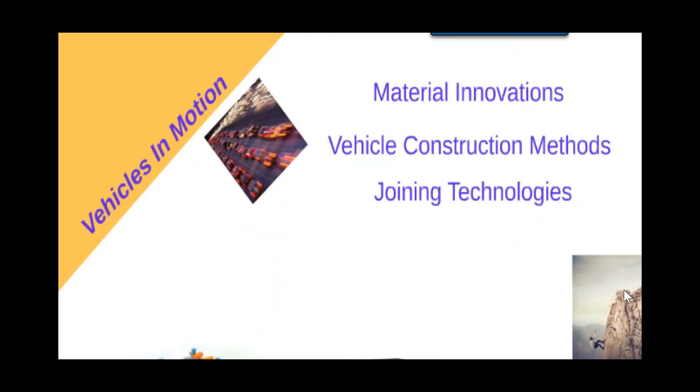We're going to be talking today about a lot of different topics, and I know the main topic was going to be steel and aluminum, and surely we'll talk about that in detail, along with some of the other challenges that we're facing in the industry today. So we're going to talk about material innovations, vehicle construction methods, whether it's steel, aluminum, maybe a little carbon fiber. But the other thing that's changed with that are the joining technologies that have evolved due to the advanced high-strength steels and so forth.

So this really is about technology, about quality, about precision. We'll talk about a little bit of welding and how all of those things affect the vehicle. We're certainly not dealing with the same vehicle that we were 10, 15 years ago, or in many cases even 2 or 3 years ago. And that's just how fast technology is changing.

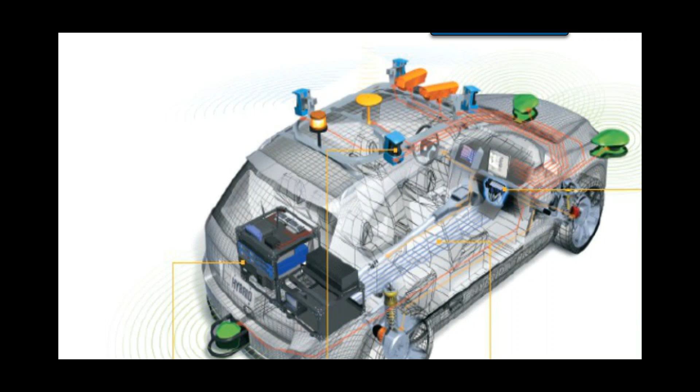Now, we don't see stuff sticking out of the car like that on modern vehicles, but that's installed somewhere on the vehicle so they can perform all the functions that are needed for safe driving and some of the things that go along with that.

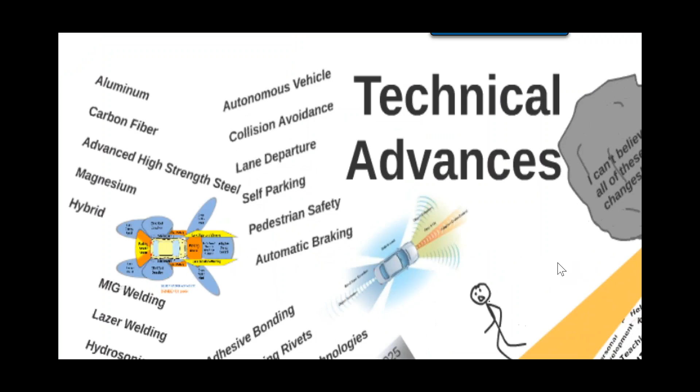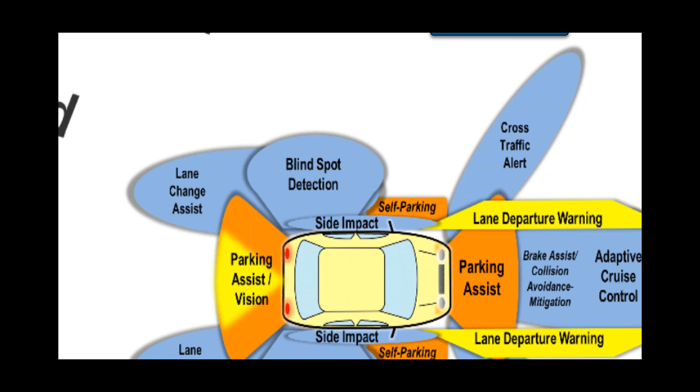You know, when we talk about vehicle construction, there are so many technical advances coming our way. It's actually just too fast for the technician, who can hardly hold on to some of these changes in our industry. We're dealing with different materials all the time: aluminum, carbon fiber, advanced high-strength steel, magnesium, composites, all kinds of different things. And all of that goes into not only the vehicle structure and strength, but add all of the things that we just looked at about blind spot detection, parking assist, brake assist, all the other things that go along with the vehicle. And as you know, it becomes a complicated thing.

Well, why do we have these changes? Because of the corporate average fuel economy, the federal government mandates that vehicle manufacturers get 54.5 miles per gallon by 2025. We're not quite there yet, folks. But that's why we're seeing all these changes. Vehicle manufacturers I deal with frequently say a gram a day. What that means to them is if they can reduce a gram of weight from the vehicle every day, they are succeeding in getting better fuel economy. The lighter the vehicle, the better the fuel economy.

So we see a combination of a lot of materials, and the question always comes up, well, which one's going to win out? Aluminum, steel, carbon fiber, magnesium? I really can't tell you, but I do know this. You're seeing all of those in all kinds of vehicles.

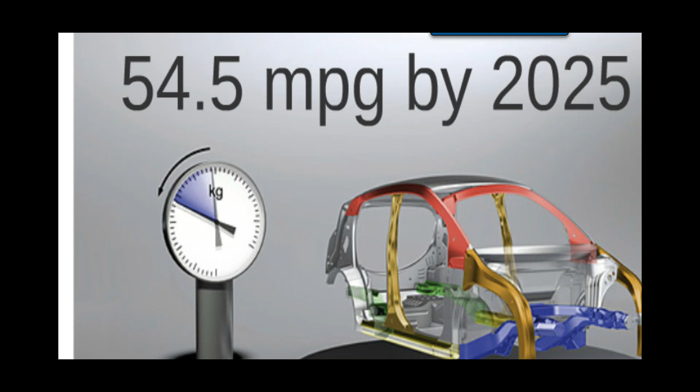So I don't know that we're going to see one predominant material. I'm going to assume that with technology and as it changes, the normal vehicle will have 3, 4, 5, 6, 7 types of materials. Well, every time a vehicle construction changes, it changes how we repair the vehicle. And what we have to do is stay up with the industry. That is a tall task for everyone.

I recall working in the body shop in the back of the dealership, probably the last person to ever know of any of the changes that happened on the vehicle. Didn't have access to OEM information, didn't get formal training. So we just fixed the car the way the guy in the stall next to us did, not knowing if that was the right way or not.

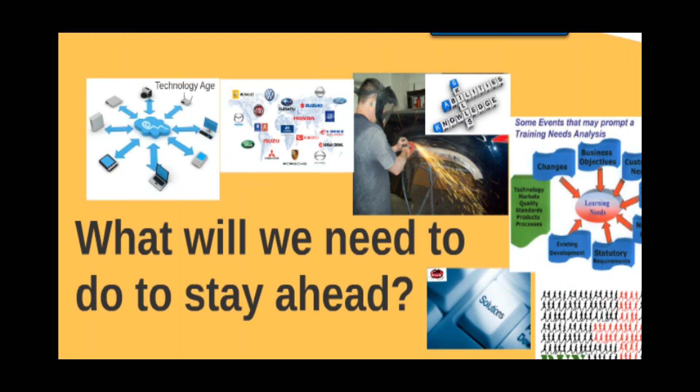So what do we need? We need solutions. We need to know that what we're doing to repair the vehicle is correct. And OEM repair information supersedes anybody. I work for Chief and have since 1986. I've also taught I-CAR classes for 25 plus years, and it really doesn't matter what Chief or I-CAR says. It's what the OEM says. They're the ones that call how they want their vehicle repaired.

So looking at education, how do you get there? I don't know. You just have to keep going, have to keep trying to be educated. And it takes an effort. I'm sure that people today realize that if you want to be doing this kind of work the next 3 to 5, 10 years, training is going to be required. And it's not just training. You know, we think about training. We don't act on it all the time because we don't have a formal plan of how we go about understanding what our training needs are.

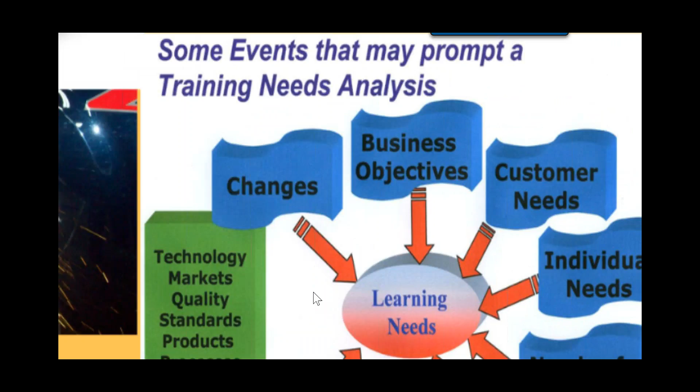So you can kind of look at this little chart, and you see some of the business objectives, the customer's needs, that person's needs, the needs of the shop, the technology and the changes. All of that becomes part of a learning needs assessment. And I guess as an industry, we're not real used to doing something like that. But the better trained your people are, the better they will perform, and the better chance you'll have a good, safe repair when you deliver the vehicle. Nothing's worse than hanging your head when you deliver the vehicle knowing that something isn't what it should be.

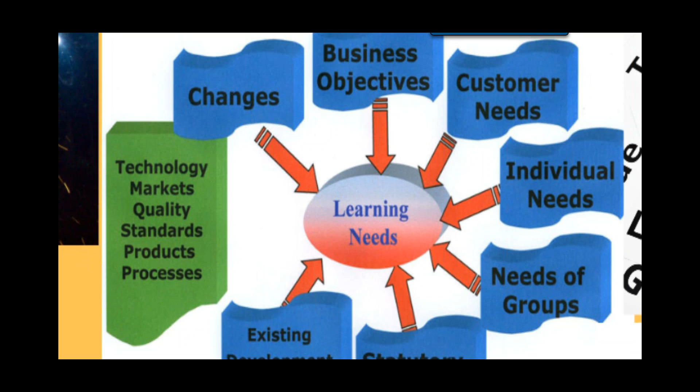For those of us that have been in this business for a long time, we have to take ownership of being a lead technician, being a trainer, being a coach, helping those that are on their way into the industry with personal development. I happen to be working at a shop where we're doing some training. They have 3 apprentices. Each technician has his own apprentice that he teaches, he coaches. He's ensuring their personal development, they get the right tools, they're going to the right classes. Folks, that's what it's going to take for our industry, the right people to fix these cars correctly.

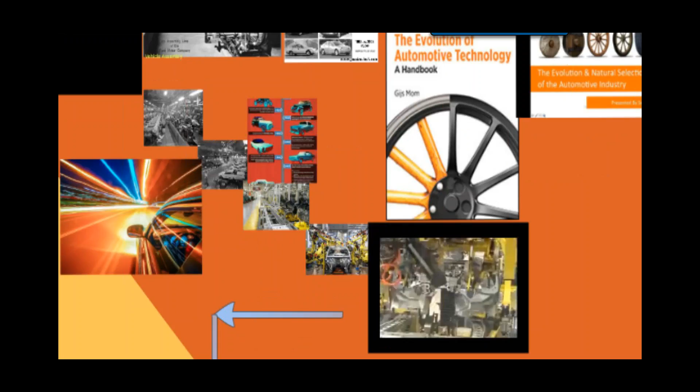Work safety, obviously we're dealing with a lot more technology than we have in the past. We'll kind of skip that for today, but a good topic. You know, they just don't make cars like they used to.

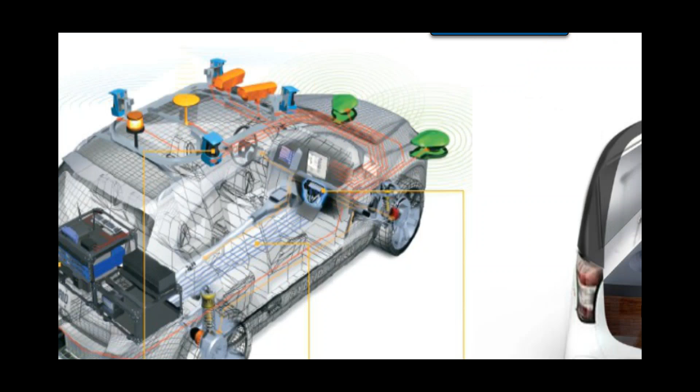I like to play this little video because it's kind of fun, if it'll play for me. Let's see. Whoops. Sorry, folks. This is more embarrassing for me than you know. We'll get back up there in a second. I'm sorry. Hope I didn't make you too dizzy. Well, certainly my little video is not going to work, so that tells me that the one at the end is not going to work.

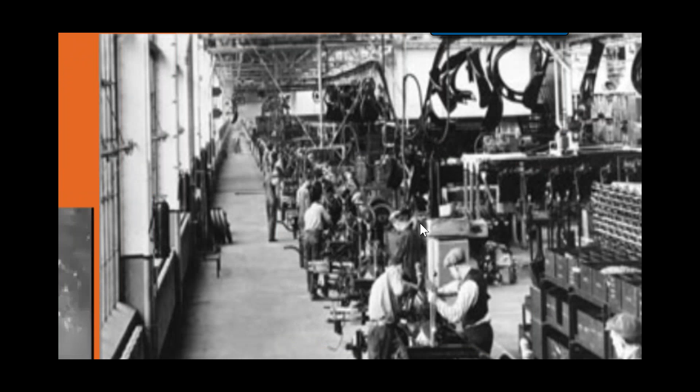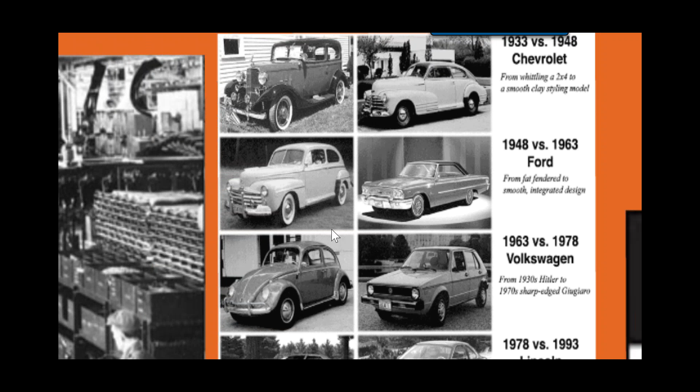But you know, you kind of talk about the evolution of the vehicle. We've come a long way from assembling vehicles like you see here on an assembly line. All the way through the early 30s and the 40s, and then getting into the 50s, we saw the changes in the technology in vehicles. Every time a vehicle construction changes, so does the method of how we repair it. How they build the vehicle has become really high tech, as you see here.

As you notice there, it's pretty high tech, how vehicles are built. So the construction of the vehicle has changed drastically. And I brought this little photo up here just to kind of show you one of the things that's real critical on advanced high-strength steel vehicles, which is where we'll start with this.

You know, all of us have looked under a unitized body vehicle before and seen where the frame rails are like this or like this, and then they just disappear. When you look at a late model vehicle, you see something different than what we had in the past. And it is this right here. It's another subrail. It goes out, and if you look at it, it goes right out into the rocker panel.

So on what we've experienced on a hard front end hit, we see things that we haven't seen before. A vehicle runs into a wall at 35 miles an hour. You can still open and close the door. Not even a buckle in the roof. Where did the damage go? It's a great question. In our classes, we used to call that collision theory. We thought we knew where the damages were going to deflect through the vehicle. We no longer call that a theory because it's actually a dynamic that's built into the vehicle.

The engineers that build vehicles call that load pathing. We don't use that term very much in the industry these days, but it's becoming very, very critical that we understand what load pathing means. It means as the vehicle collapses during a collision, the forces are distributed through spot welds, not pinch welds, through spot welds to a place where there's a reinforcement where the forces may be directed to the side, to the rear, or down. That's why we call it dynamics, because it's built into exactly how the vehicle will react in a collision.

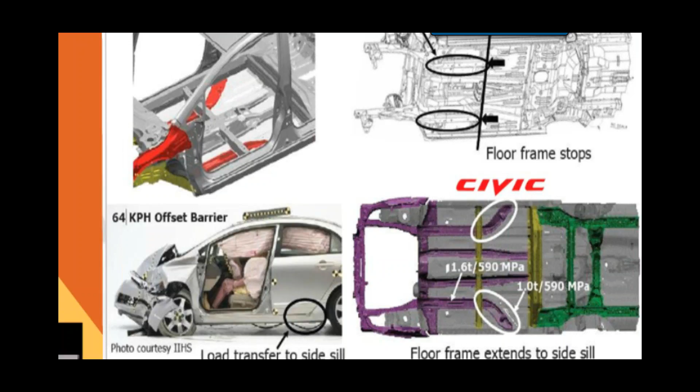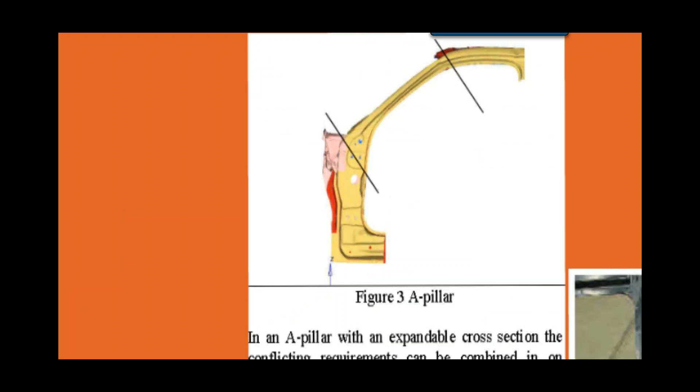So efficiently, things like we saw in the past where we could do an A-pillar, and maybe you could section it in the past. If you look at this yellow piece, it's not repairable, not sectionable, so you can't even section these components. It becomes a real problem. You know, vehicle manufacturers are changing technology so fast, it's almost hard to stay up with.

Now, what I'm showing you on the screen here is a design that BMW played with that is an A-pillar. And on this A-pillar, what you will see is it's very large in the beginning of it here. I'm sorry, it's kind of backwards. It's small at the beginning. And the reason the manufacturer would want to make that smaller is for the blind spot, so you can see around the A-pillar. So if they make that smaller, you have a better line of sight.

This A-pillar that you're looking at here is made of folded metal that upon impact expands to the size of the original type of A-pillar. Folks, that's something we've never seen before. It's not on the market yet. It may be. Lord help us if we try to cut through that A-pillar. Who knows what kind of damage we'd cause with that.

We just need to know how to fix them. I'm convinced that we can fix just about anything. We just need to know how and make sure that it's a recommended procedure by the manufacturers. They certainly don't build vehicles like they used to.

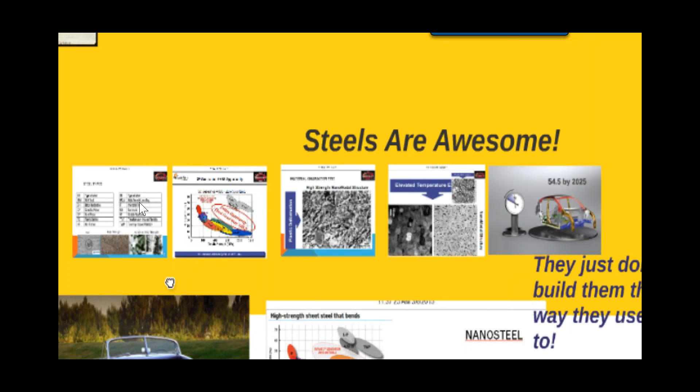Excuse me. I want to spend a couple of minutes on steel. Steels indeed are awesome. I don't know, I get excited when I'm around steel. I'm sure somebody else out there has been like that. I remember when I went through Bethlehem Steel the first time, I could not sleep at night. Something wrong with me, I know. But I want to click on this a little bit here and talk about steels. Bring this one up and over.

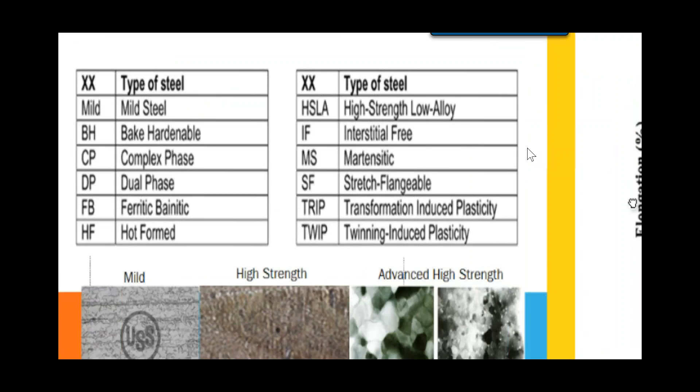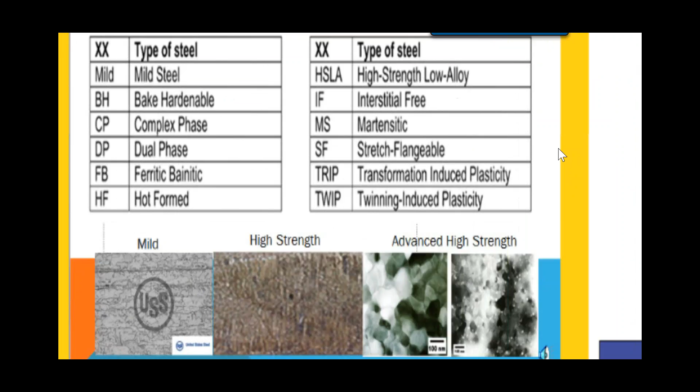And as you look at the screen here, what we have here are various types of steel. These are not all of the high-strength steels or mild steel families that you would see, but only a few. But I put these on the screen to make a really good illustration of what's happened with steel. And not only that, where are we going with steel? I don't think they're done making developments. You know that 80% of the steels on the market today have been developed in the last 15 years. That's a huge amount of development and a huge amount of change.

You know, when I started working on vehicles, they were all mild steel. And if you look at that picture under a microscope, you can see the grain structure, and the grain structure is kind of spread apart. So for mild steel to get strong, it needs bulk, thickness. One of the ways that we measure the strength of steel is a yield test. So if you were to take that piece of mild steel, grab onto it on each side and pull it apart, it would take approximately 30,000 pounds of pressure to pull that piece of steel apart. Now that sounds like a lot of pressure. But now we're dealing with bulk.

And in the 70s, when the corporate average fuel economy was first made by the government to increase vehicle mileage, the manufacturers had to rethink steel. That's when the HSLA steel started coming out. And what you see with that is a much tighter grain structure. The tighter the grain structure, the stronger that steel will be. In this case, with a yield strength of approximately 70,000 pounds per square inch of pressure to pull high-strength steel apart.

Now, some people aren't even aware of this, but you need to research what you can and cannot do with high-strength steel, HSLA, the steels that we had in the past, where they had guidelines. As an example, Chrysler in the past was 750 degrees for 2 minutes. GM is 90 seconds, I think, or 1 minute or something like that, for 1,000 degrees.

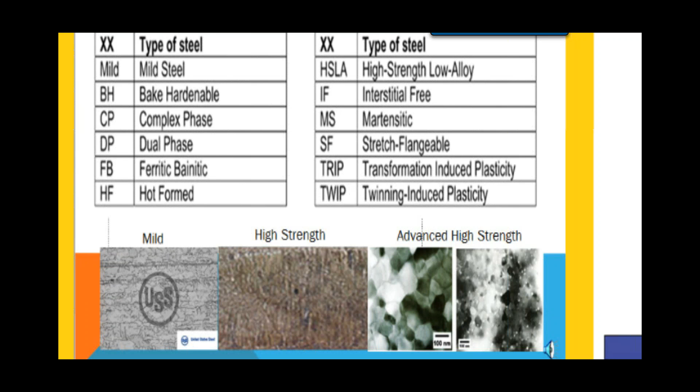It's not that we can't fix the vehicle that has advanced high-strength steel. We just need to know what? How the manufacturer wants us to repair it, or in this case, replace it. As you look at this chart that's now on your screen, what you're seeing here is the TRIP steels, dual-phase steels, and martensitic steels, and the tensile strengths that they have out into this range. The newer steels, the future steels, you're going to see out in this range as well.

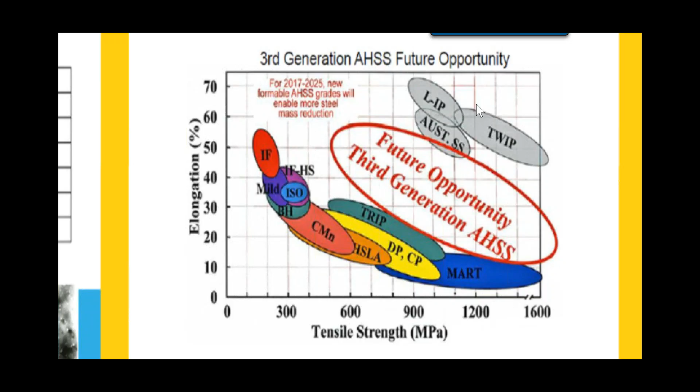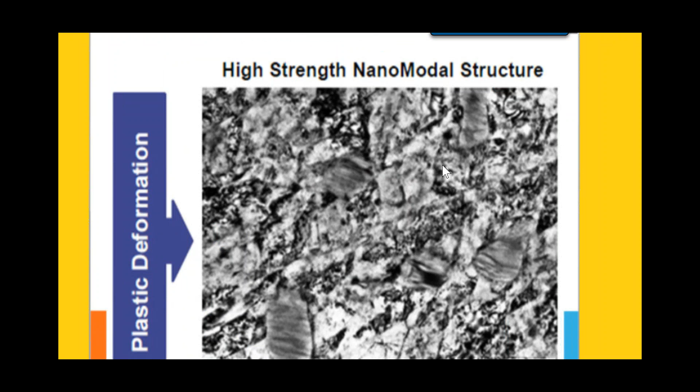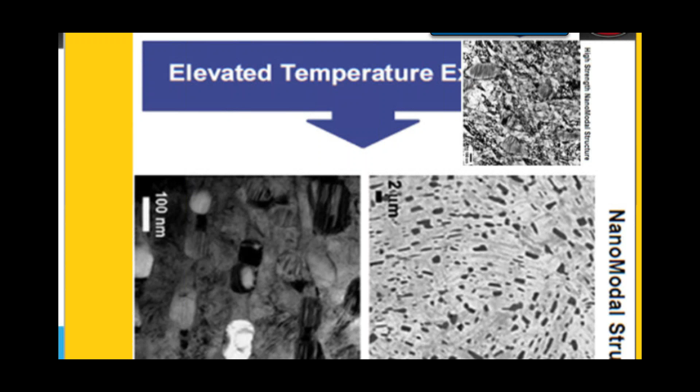You have an advanced high-strength steel that's super thin and super strong, except for where it had been heated, and then it's been weakened. We're seeing vehicle manufacturers recommend MIG brazing on advanced high-strength steels, where there's no actual fusion that takes place. It's kind of like a glorified gluing, if you think of it in those terms. Folks, where are we going from here?

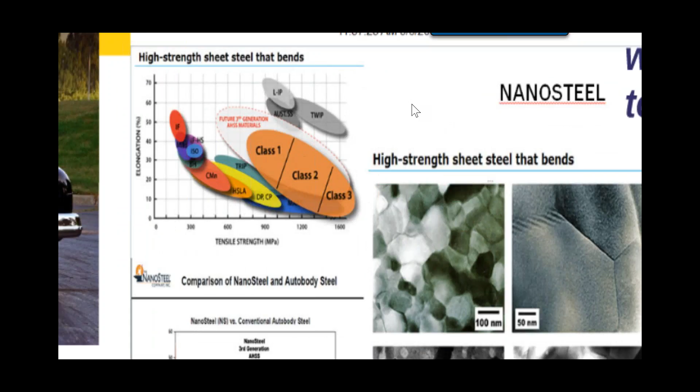I guess I'm going to challenge people that are listening. Type this into your browser someday: nanosteels. Nanosteels will exceed what we see on normal sheet metal in the next generation. All the steels that we've been talking about are in this category here. And if you look at nanosteels, they are way out in this category.

Without getting too carried away with nanotechnology, think of it this way. A nanometer is 1/50,000th the thickness of one human hair. It's hard to get your head around that. 1/50,000th the thickness of a human hair. Put 5 of those together, put 10 of those together, and they have a working guitar at that level. Folks, you can't see it. You need an atomic microscope to see this nanotechnology.

Nanotechnology is different than the steels that we're dealing with. I'll just give you a real quick observation. The steels that we've been talking about, they're crushing molecules and binding them together. Nanosteels are like a building block from the blueprint that builds from the nano level up. So they're building from a level that you cannot even see up to a strength that duplicates the strength of a diamond with the thinness of a regular piece of paper.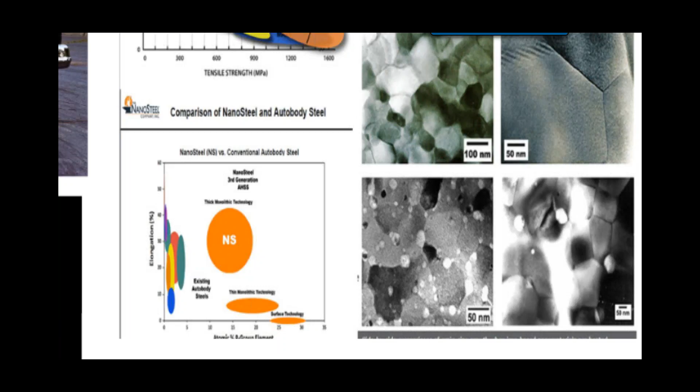That technology is where we might see in 2025 that lightens the vehicle to a point. Oh, by the way, nanosteels can reshape themselves because they're built from a blueprint. I'm waiting for that car, I don't know about you guys. So look that up sometime. You'll find some really, really cool information on steels. And again, that's where we're going.

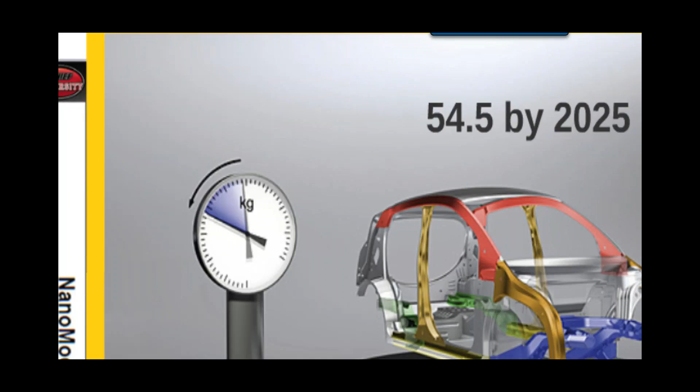We have to do these kind of innovative things to get to the 2025 goal that year of 54.5 average fuel economy. I like it.

Especially for the price of gas. I don't know, maybe even the price of eggs now.

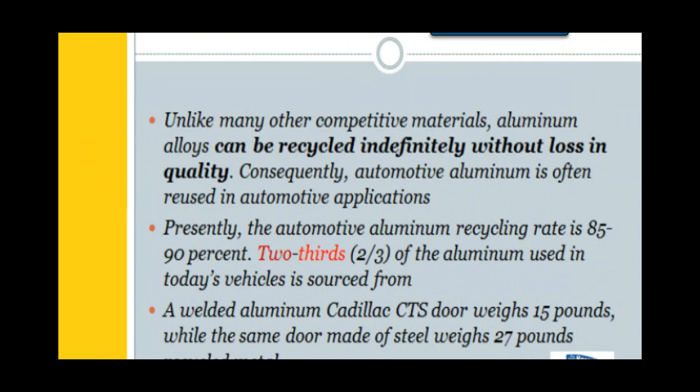So that kind of wraps up our steel a little bit here. We're going to focus on aluminum a little bit here. Aluminum has such tremendous qualities, folks, because it can be recycled indefinitely without loss of quality. So 2/3 of the aluminum that we already have, it's already been maybe a Coors can or something. Now it's a Cadillac CTS door, where it weighs 12 pounds less than the same door made of steel. It makes a lot of sense to use something like aluminum. Aluminum has some tremendous qualities, as we'll see here.

I kind of use this little screen here to kind of show you what we actually have in the aluminum class. And this is actually a table of contents out of the aluminum class. So we're going to kind of start here because in the industry we have some conflict between aluminum and steel. What does it take to do aluminum? Is it more difficult than steel? And why is this and why is that? And it creates a conflict, and that conflict is a result of a lack of communication and lack of knowledge. It boils down to that every time.

What you'll find with aluminum vehicles, certainly, is the vehicle manufacturers giving recommended repair procedures and very specific procedures. Because if you're going to work with aluminum, one of the things we need to know about aluminum is right there, the alloy. You need to know the alloy of the aluminum you're working with so you can select the right aluminum welding wire. If you don't have the right welding wire, you can't guarantee that you'll have a good weld. So knowing the alloy and the characteristics of that alloy, by the way, alloys are determining the strength of that aluminum as well, whether it's 1000, 2000 series aluminum.

If we don't know that, the alloys, it can create some real monsters for us. We can work all day long and just beat ourselves against the cement and get nothing done. Because aluminum's different. It doesn't mean we can't fix it, it's just different. It's made different in most senses. You know, the stamping that is done on steel parts, same thing. Put a piece of aluminum in a die, there you go, stamp it out, you got yourself a fender, quarter panel, whatever you're looking for.

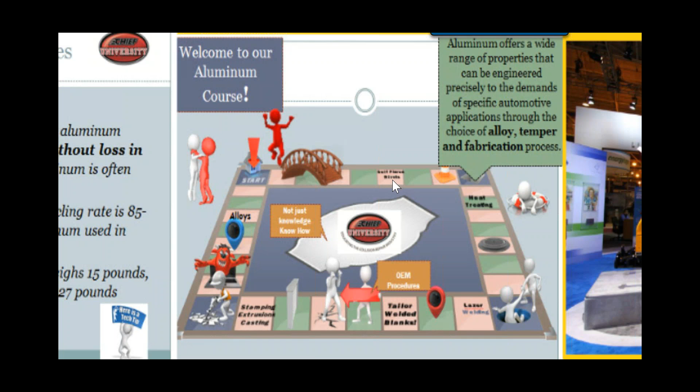They provide the instructions, and the thing of it is, Ford is different than most manufacturers, and they allow you to make the decision of how you want to repair the vehicle, whether you're going to weld it on or adhesively bond it and rivet it on. I would suggest getting some training on that for sure.

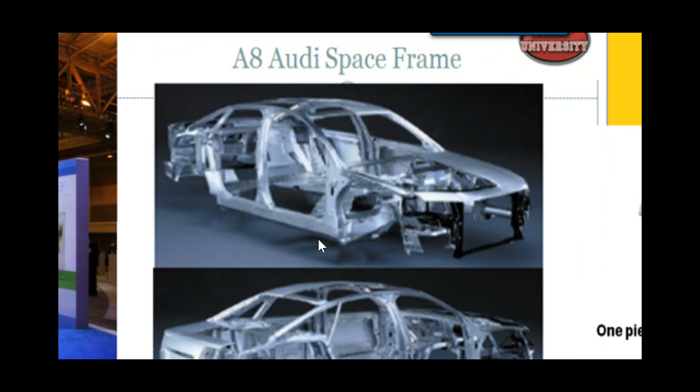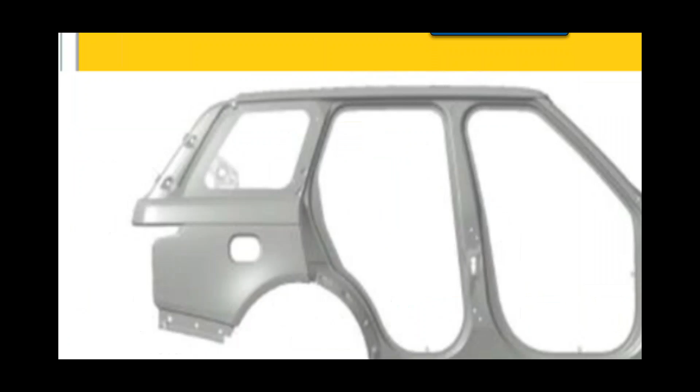You know, the Audi A8 space frame will take the crash test and pass it like this without any sheet metal on it. That's why it gets a 5-star crash rating. Aluminum can absorb a lot more forces of a collision than steel. This might be an example of a tailor welded blank on the Range Rover. We have several different grades of steel. Aluminum hang-on parts, they have some criteria for that. We're just going to kind of skip that. If it's a stamped part, you determine whether you can repair it or not.

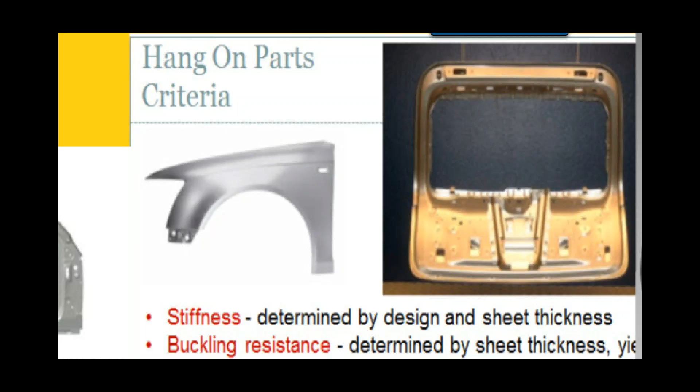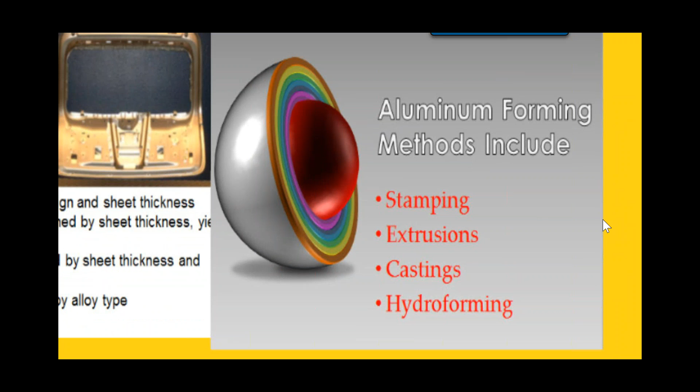But, you know, like we mentioned earlier, aluminum can be formed in several different methods. So stampings, extrusions, castings, and then hydroforming, which we didn't talk about, like the Corvette frame, it's hydroformed. By changing that frame from steel to aluminum, it lightened it up 500 pounds. That's quite a substantial savings that you can put toward fuel economy.

I won't bother you with the technology that's in a Coke can because we'll run out of time, but the hem flanges on a vehicle are similar to the top of a Coke can. 3 or 4 different types of alloys in the same Coke can, 3 or 4 different alloys in a vehicle. There's a lot of similarities. The little tab on top that holds the pull tab is an example of a clinch joint, and that's how they hold the hood together. Not like that exactly, but a clinch joint is used to hold together parts of the Ford truck as well.

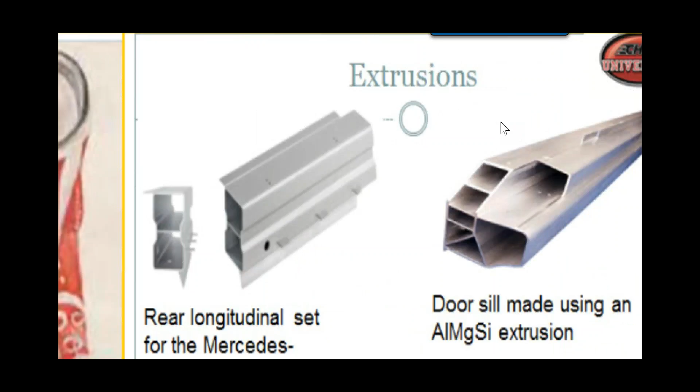Here's an example of an extrusion, and what you can see is a reinforcement that's built into that extrusion, that inner structure, that honeycomb design. Folks, if you didn't know that was there and say, oh, I think I'll just cut this one right here in section, you got a world of trouble coming because you could no way section a rail like that. I don't mean to be scary, but many European manufacturers are designing so the front rail or the rear rail would go right inside of that extrusion. So if you have to replace a front rail, you're way back in here into this rocker panel. I don't try to explain how they build them. I just try to fix them like you guys.

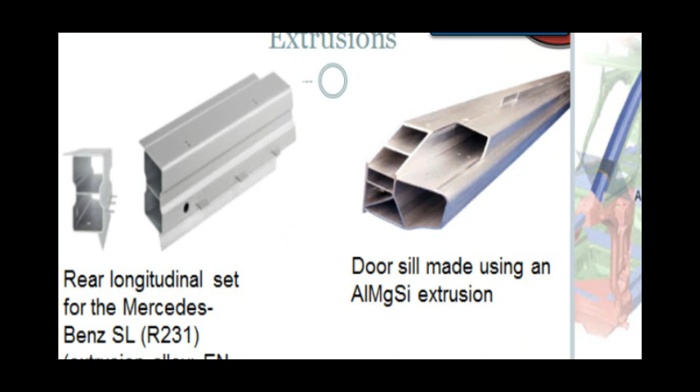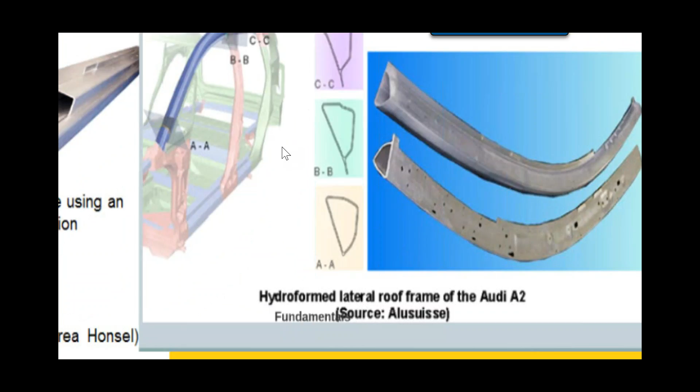Well, you're seeing a lot of this hydroforming done where they can condense down several pieces into one. It makes a lot of manufacturing sense. We won't spend too much time on that. But most vehicles have that kind of technology.

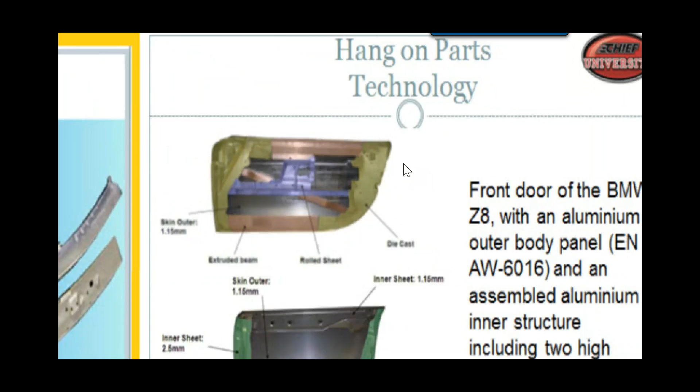You know, it's a little different on aluminum, and this is a cool picture if you look at it. I know it's a little bit blurry and probably not the best, but it's off of a BMW Z8. And what's really neat about this is you have all kinds of technology in one piece. So you have a die-cast door frame here. It's an extruded beam here, so it's welded together here, an extrusion and a cast. I have an outer skin, and then you have rolled sheet that is this reinforcement. All this different technology in one door. What are you going to do to repair it? I have no clue. Who does? The manufacturer. Have to know what their manufacturer's recommendations are.

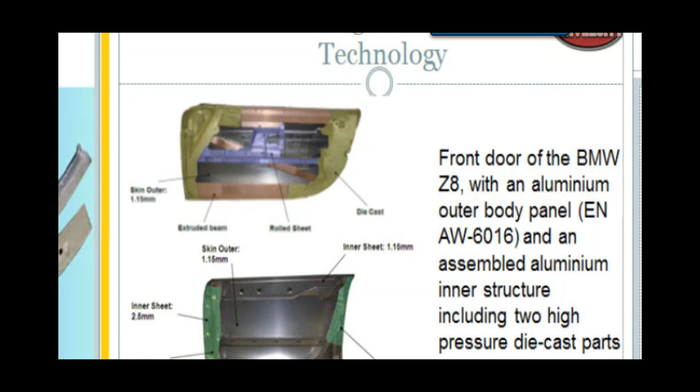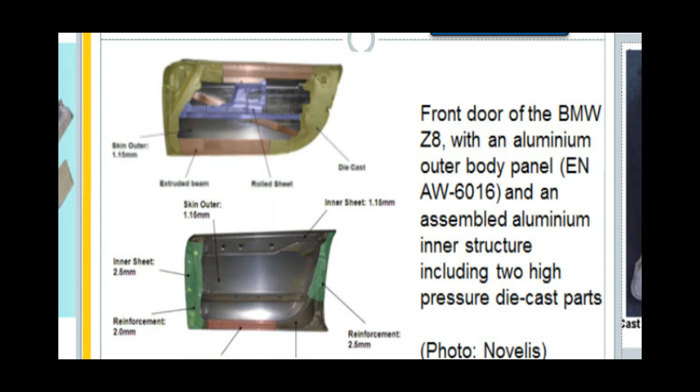Folks, some of these cars have a little sensor inside of this door that determines the air that is pushed out of the doors as a result of an impact. That door can't even be repainted unless it's stripped down and brought to exactly the same mill thickness. You cannot use filler on that door. It has to be metal finished. So you get a little ding in the door that comes in, and oh yeah, I don't fix BMWs very often, but I got one here. I can fix that little dent, bondo it up. Works great till when? Till the airbag in the side deploys incorrectly. Huge liability. We need to know about these technologies.

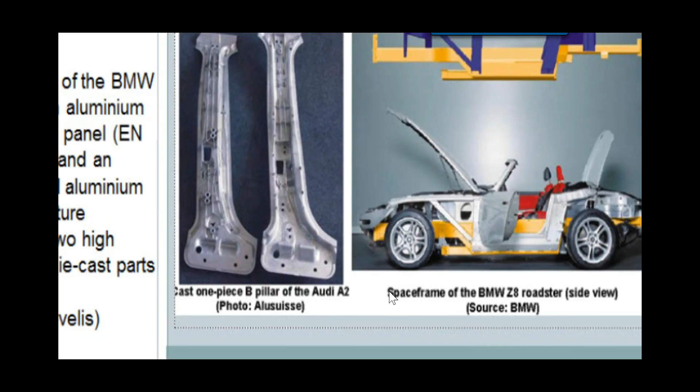We have some manufacturers that are putting a cast B-pillar. Look at all the ribbing in those areas. It's exactly awesome. No way you could duplicate this. No way you could section it or repair it. It's strictly a replacement. So on the Audi A2, the BMW Z8 Roadster, you see those kinds of technologies of castings being used.

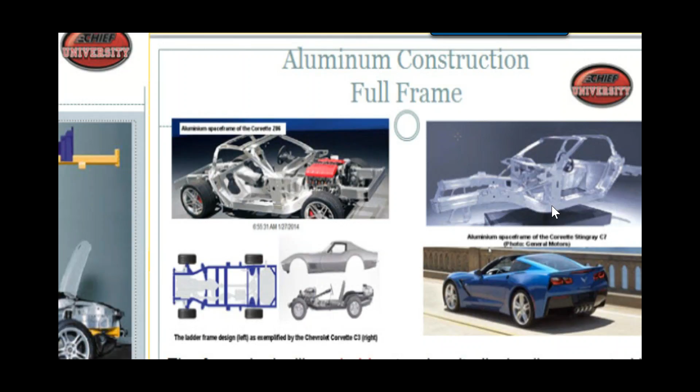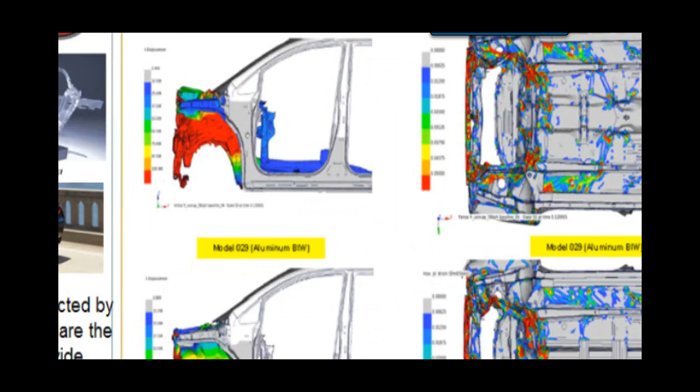I think this is probably one of the better pictures that I could show you, in that it shows a comparison of a body in white. Let me blow this up here a little bit. A body in white vehicle, one, is a steel. And what it's showing on this is the amount of absorption of forces that a steel vehicle would create running into a wall. So that's the steel, and going right underneath it is aluminum, and here's what that really is showing. And this is why manufacturers look at aluminum.

It can absorb twice the collision forces of steel. When you can absorb the forces of steel, you can slow down the collision, and you can change the airbag timing, and you can protect the passenger if the vehicle is repaired correctly. And you can see how that makes a big difference between steel and aluminum vehicles.

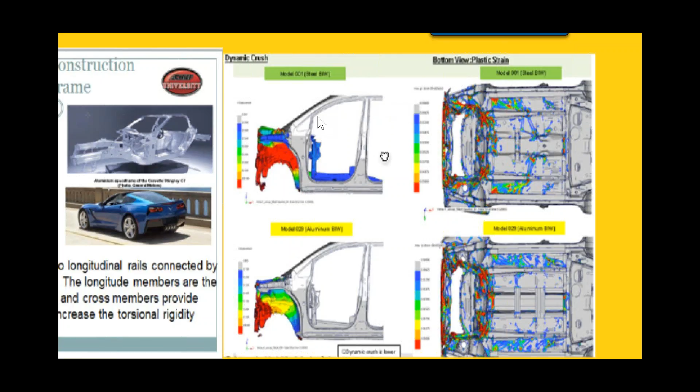Let me just throw this in real quick for those that like this stuff. Carbon fiber vehicles, if you have this kind of an impact, normally the forces are directed up through the A-pillar, right? In the carbon fiber vehicle, at the A-pillar it will crack at that location, crack right apart. So all the energy from the collision just goes through that crack and out the vehicle. Any other vehicle will go all the way back to the rear of the vehicle. A lot of technology. Again, load pathing. Kind of remember that term. You're going to see it many times in the future, I'm sure.

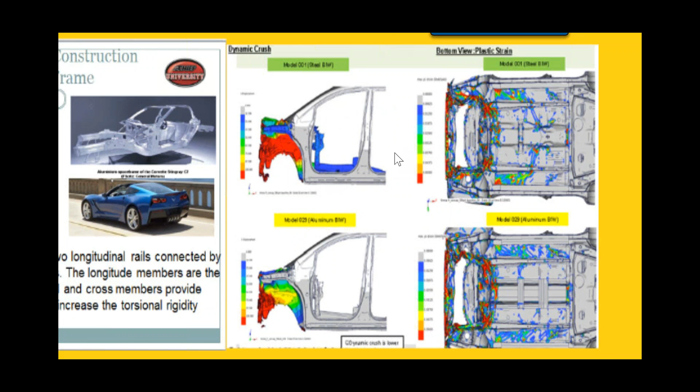Well, we'll kind of finish this up here a little bit. I think I'm close on time, with some joining technology. Because the joining technology certainly has changed as a result of how vehicles are built and how we're going about it. There's a lot of consideration that goes into it. We're not going to spend a lot of time on this. I would love to be able to. We just don't have time.

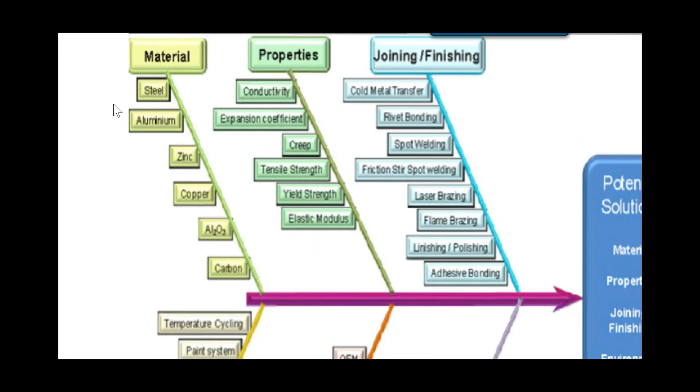But all the things that go into the selection of the materials, whether it's steel, zinc, aluminum, copper, carbon, whatever it's going to be, all of the decisions of how they're going to weld it, whether it's going to be rivet, bonded, welded, spot welded, friction stir, laser welded, flame brazed, whatever it might be. All of those technologies need to be considered on how the vehicles can be made.

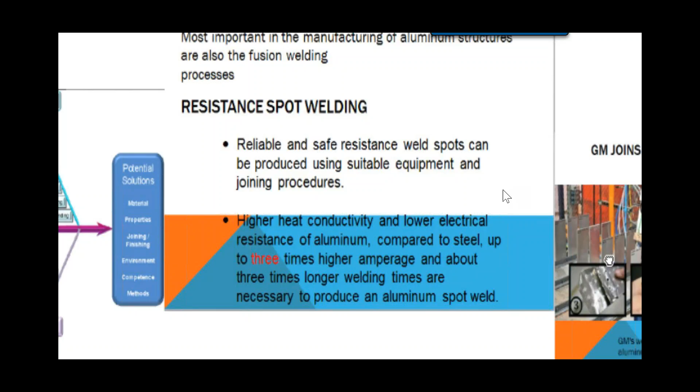One of the things that is forcing us to change a little bit is resistance spot welding when it comes to aluminum vehicles, because it takes 3 times the amperage that it does with steel. So at this point, there's nothing aftermarket that I'm aware of that you can consistently weld aluminum spot welds with.

General Motors, as you know, is coming out with a new truck, and they've come up with aluminum welding tips from the factory we can't duplicate. So we're going to be dependent on them to tell us how they want their vehicles repaired. That's coming next year, folks. You need to start getting ready for that now.

I'm going to show you these pictures here because this is, in my mind, a highlight of what we're going to talk about here. As we look at this picture, these 2 photos right here are an indication of a poor weld, because it's showing microscopically porosity, cracking, and voids, or an expulsion from the weld site. This is what a good weld would look like under a microscope. Why am I talking about that?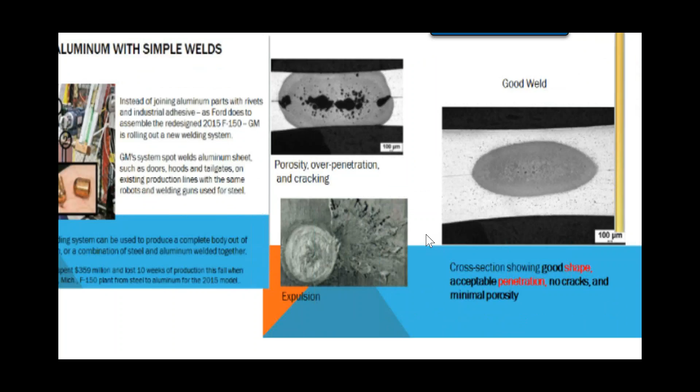Well, in the United States, we use what's called a peel test. You have two pieces of metal spot welded together. You pull the top one off, you got a hole in it, and the bottom one has a nugget, right? And we call that a good weld. That is not really a good weld. I'll show you a couple things here. I'm going to show you 12 welds. All 12 of these welds passed the peel test. Only one passed a microscopic test, which happens to be, I'm sorry, this one right here.

In other words, when Volkswagen, Audi, BMW decides that they want to have a welder that works on their vehicles, they make the manufacturer of that welder tune their welder to duplicate exactly, microscopically, the way they welded it at the factory. And that's what's called a homologation. We don't see that in the United States.

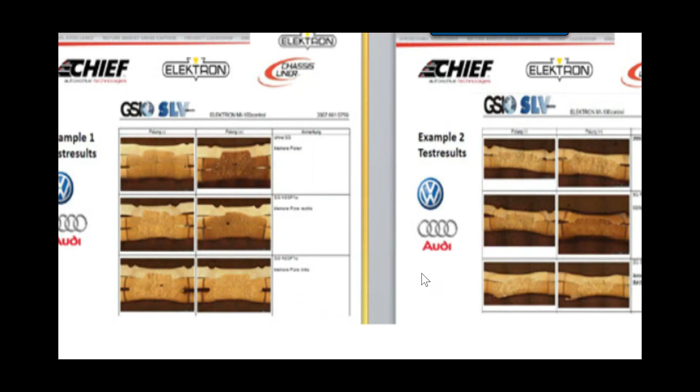That means that that equipment, if you dial it in for BMW and use it as spot weld, it will hit that spot weld every single time the way BMW said, or Volkswagen. I tell you what, that's the quality of a weld when it gets that precise. It scares me to think that all of these welds could go on a peel test and pass it, but on a microscopic test, not even come close.

Another technology, just very quickly here, is a laser weld. We traditionally see spot welds here. On late model, ultra advanced high strength steel vehicles, you see laser welding. In fact, you see all kinds of different welding technologies.

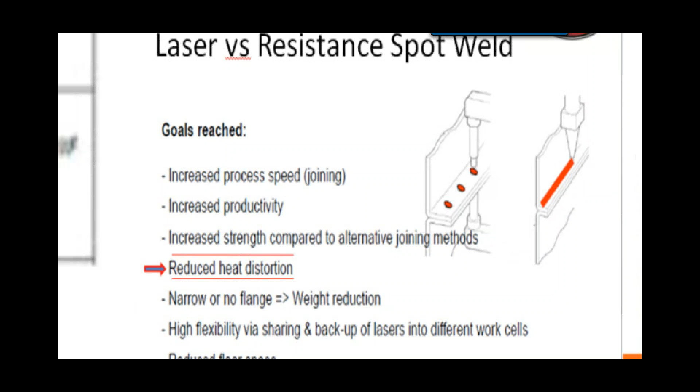Laser welding is different, it's unique, it's very accurate, it's very fine, and if you can imagine this in your mind, if you had two pieces of paper and you put them one on top of the other and you could weld through the top piece and you could weld a quarter of the way, halfway, or all the way through the bottom piece. That's precision welding. That is exactly what a laser weld does. We could no way duplicate that in the aftermarket.

That is part of, by the way, load pathing. That's where direction of forces are going through vehicles, on those laser welds. That's why we cannot repair those kinds of vehicles that have that kind of technology built into them.

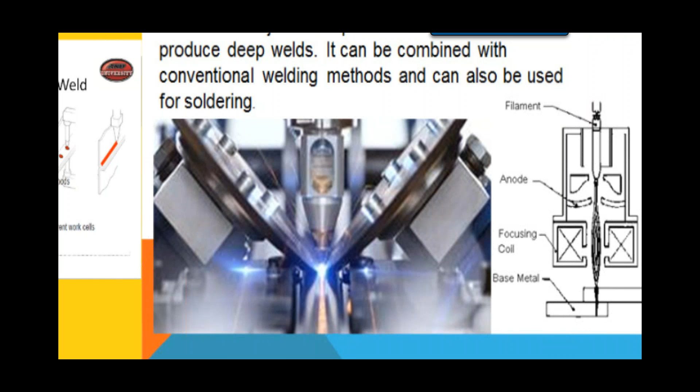I think I'm running short on time, Melissa. You tell me if I am. I would normally show this with video, but it's okay. Thank you. No, well, you don't have to show the video because you know what, it doesn't really come through very good. Yeah, and I wasn't going to.

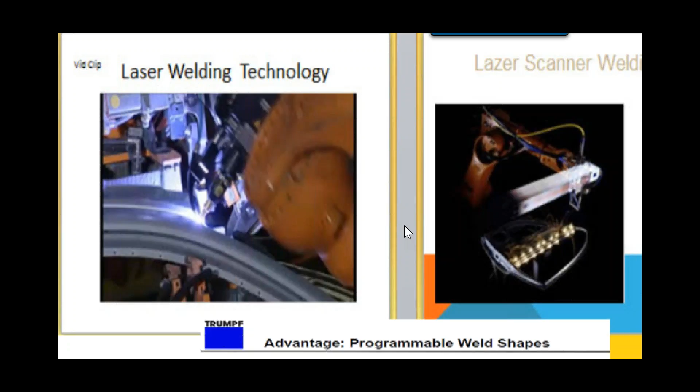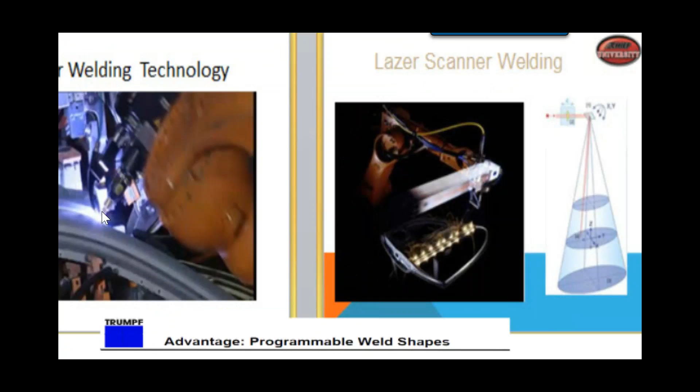But the difference with this laser welding is it's absolutely perfect, absolutely every single time. It doesn't have variables. The photo I'm going to point out right here is the latest technology where you don't see the laser hitting down here. The laser actually comes remotely. I'm going to say that's about a 3-foot distance from where the laser beam is pointing to the surface that it's welding.

And had we had time, I would show you this laser scanner welder making 220 welds in less than a minute. And each one of those welds is a different kind of weld. There's a straight weld, a slot weld, a round weld. All of that is built-in load pathing, built in by the manufacturer. Gee, nobody told us. I don't know how that happened.

The other thing that you will see is friction stir welding. Friction stir welding just takes a mandrel and spins it really fast and joins two types of steel or aluminum together. You can join aluminum and steel together, friction welding, or so they say. I haven't seen it yet.

The new Honda Civic says that the front cradle is friction stir welded, and it is. The front half is steel, the back half is aluminum, but it's bolted. The friction stir welder that they used welded just the aluminum part of the cross member itself.

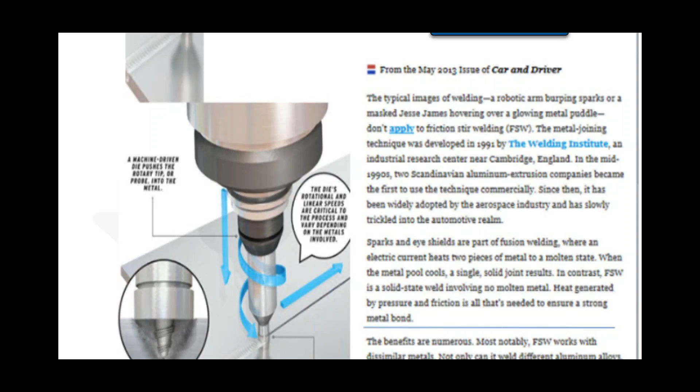And then another option for welding for aluminum and plastics is ultrasonic welding. They run at a really high frequency. I know I have some grandkids that wear earphones. I'm convinced that they listen to their music at about 15,000 cycles per second based on the way they act. But in collision repair, that high frequency can melt things together. Ultrasonic welding.

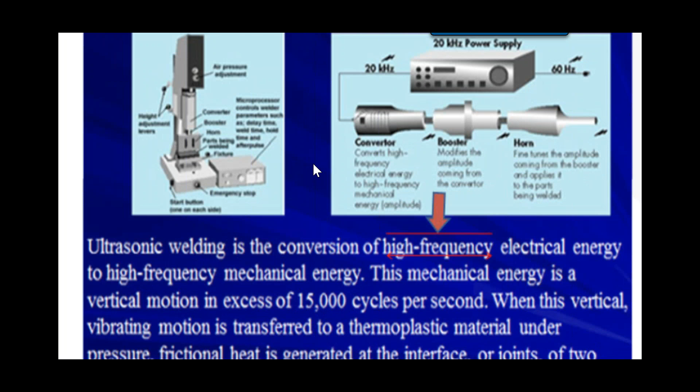Again, we spend a lot of time on this in our classes. Then cold press welding is coming back. That was invented in 1724. My goodness, and all of a sudden we're using it again.